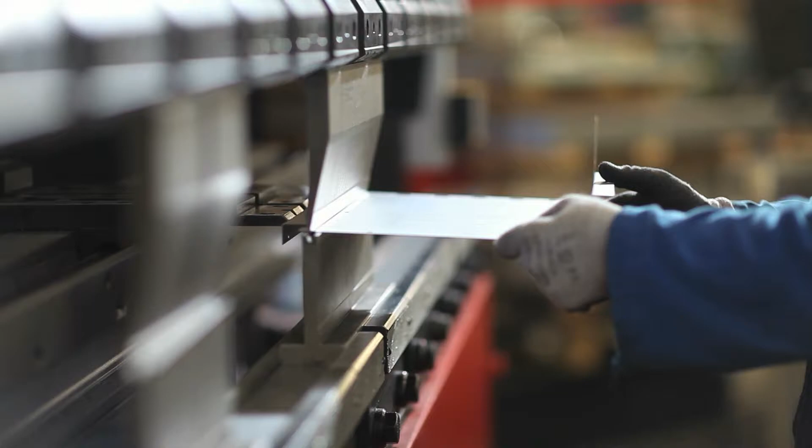Need sheet metal designs fast? Meet BricsCAD Sheet Metal.

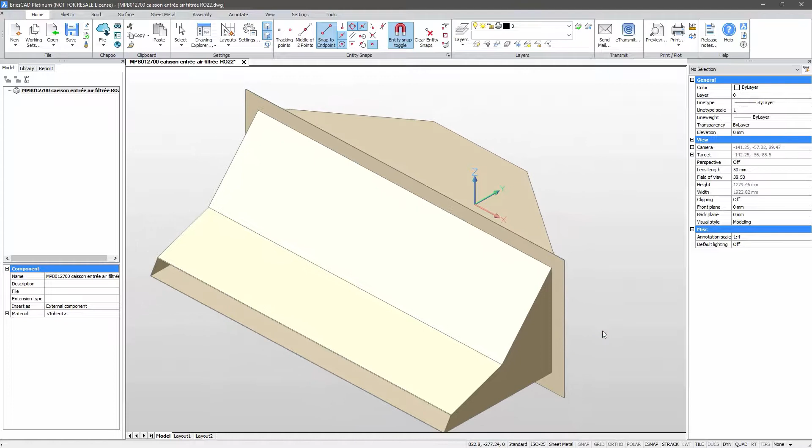Let's investigate the creation of a sheet metal airbox from an existing solid model. We'll import a step file. Here on the Properties panel, you can see that we start with a simple 3D solid.

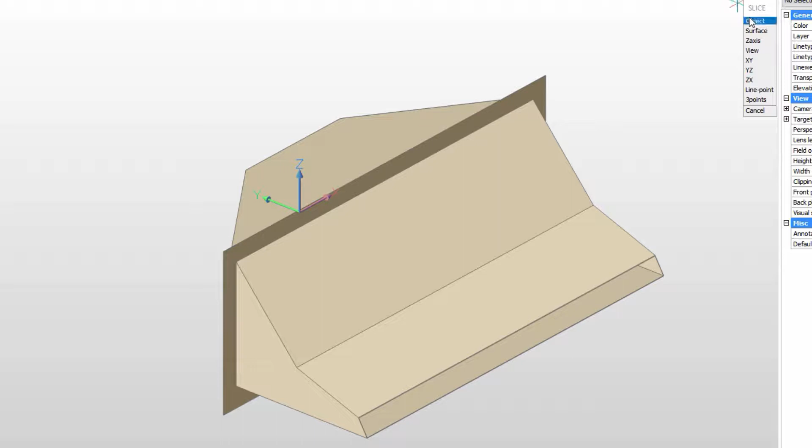If we want to make this part from sheet metal, we're going to have to break it down. We'll simply slice the model in two, using one face of the thin middle plate as a guide. Then we'll repeat the procedure on the other side.

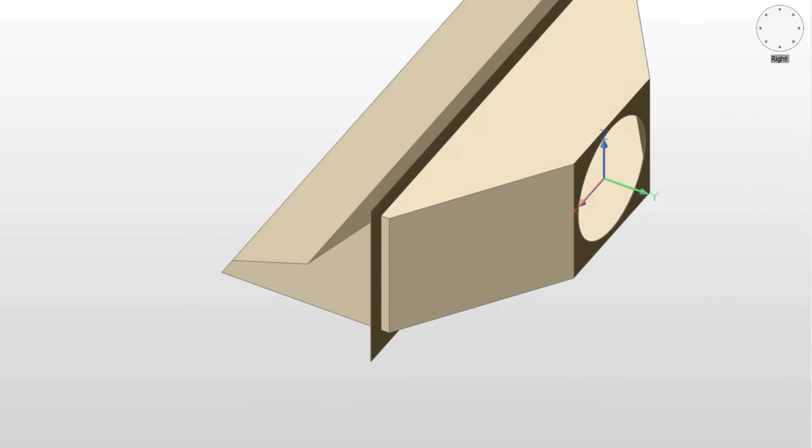Let's spread the part out a bit so that we have some room to work. 1 minute in, and we've imported, sliced and positioned the geometry for the next steps.

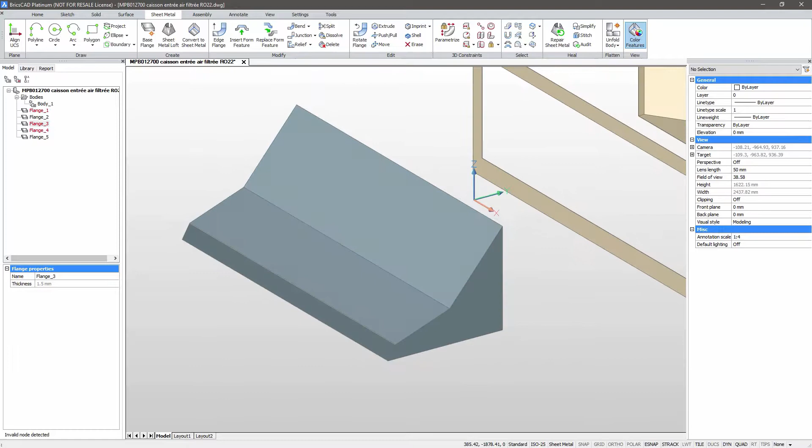We'll convert the first half of the airbox to sheet metal. Look at the mechanical browser. We now have a body with 5 flanges. We'll start creating junctions by selecting 4 inclined edges of the part.

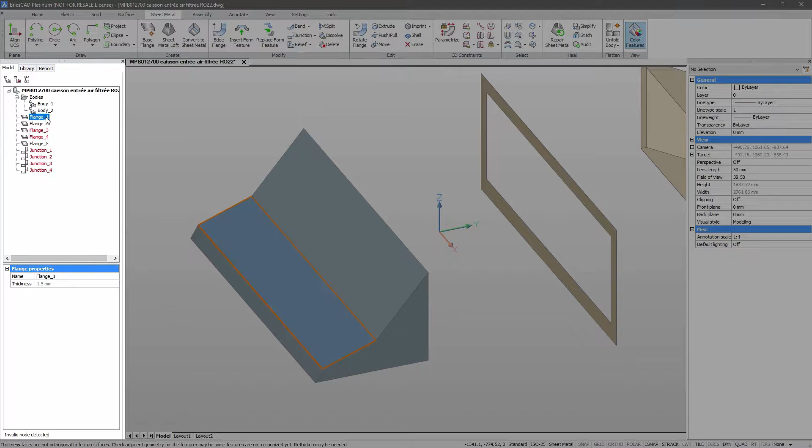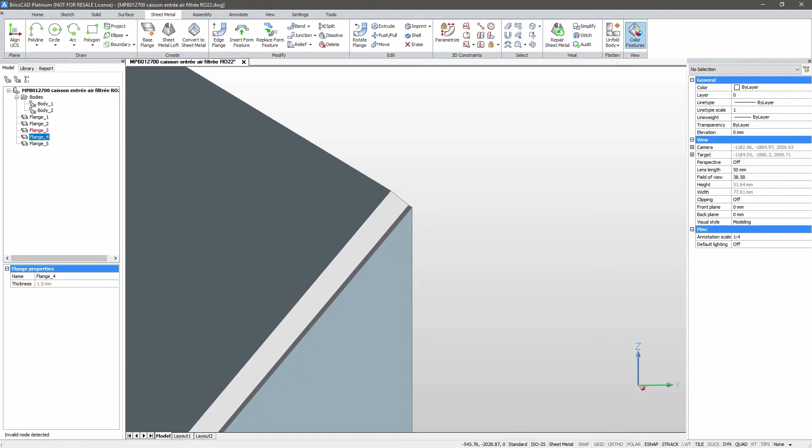Okay, BricsCAD has flagged several components in red. Let's fix them. Let's zoom in on flange 4. The side face is not orthogonal to the flange. The repair takes seconds. Let's do the same repair on the other side of the part.

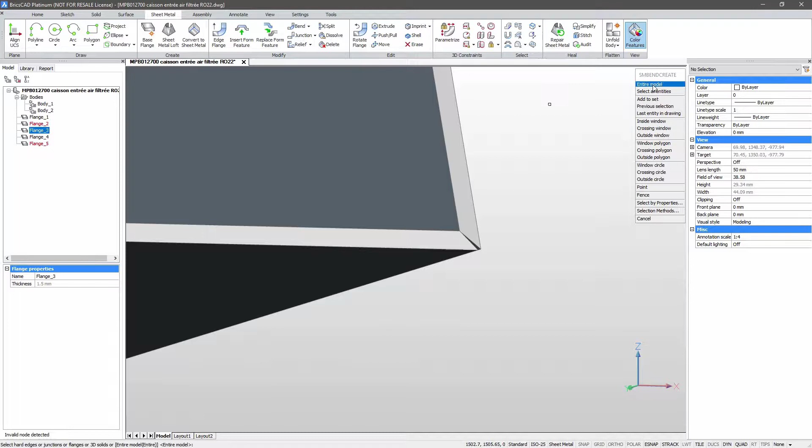This mismatch will be fixed automatically at bend creation time. We'll bend the entire model in one pass, with reliefs created automatically. You can switch the type of relief simply by selecting it.

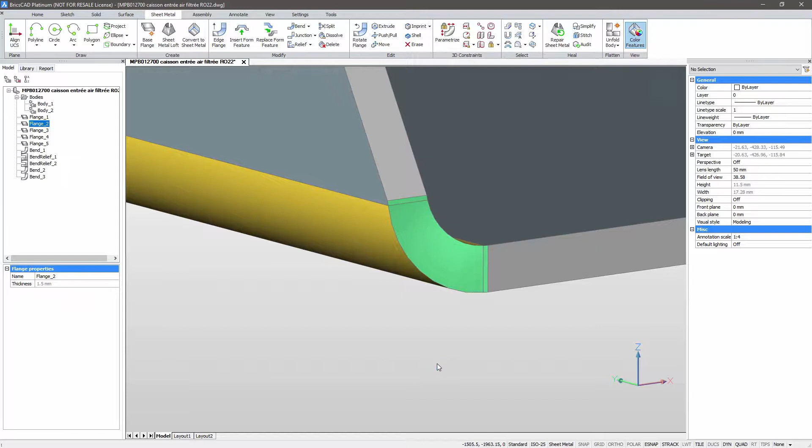Okay, our model is clean and valid. Let's unfold it. Note that the unfolded representation shows all necessary bend annotations and overall dimensions.

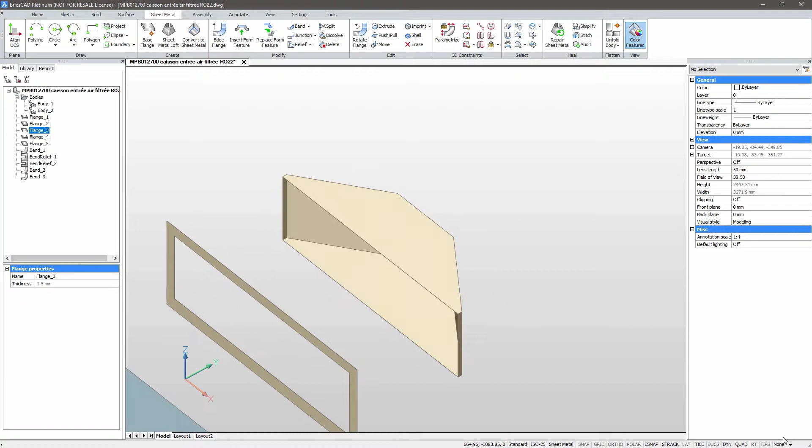Let's move to the second part of our imported model. We'll use the sheet metal convert command again, and you'll see that all new flanges are valid from the start. We will create reliefs across the entire model with one command.

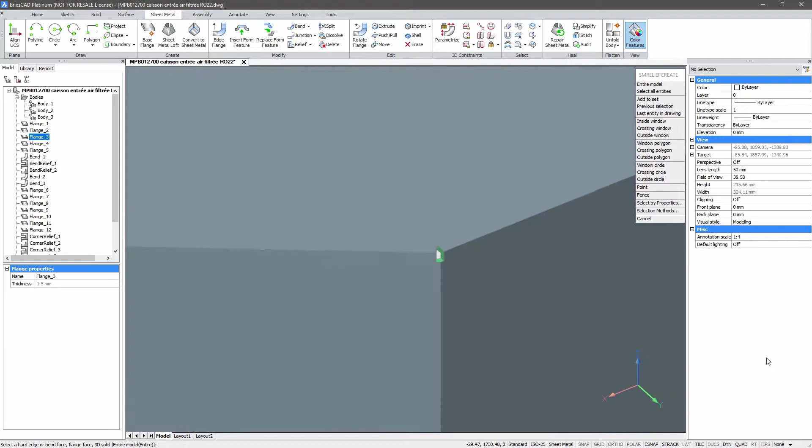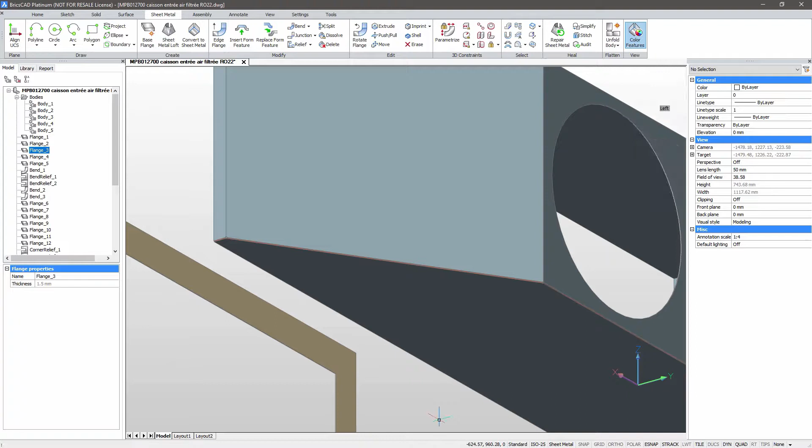Hard edge junctions are also created automatically. Select a flange and all hard edges will convert. Let's do the same for the bottom flange. And now we'll apply bends to the whole model. We'll unfold.

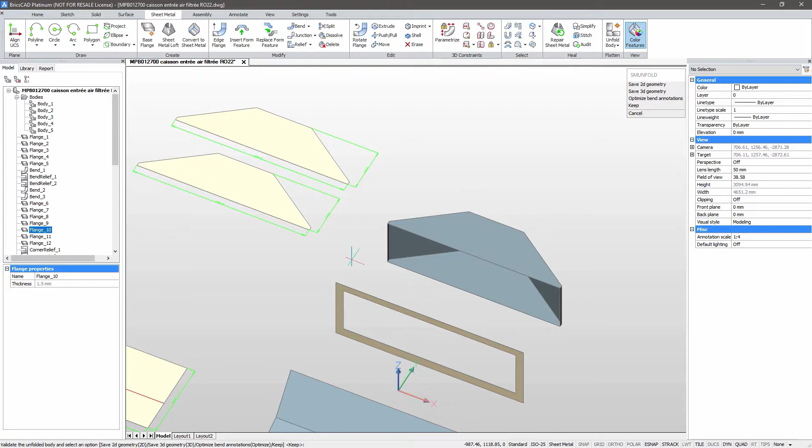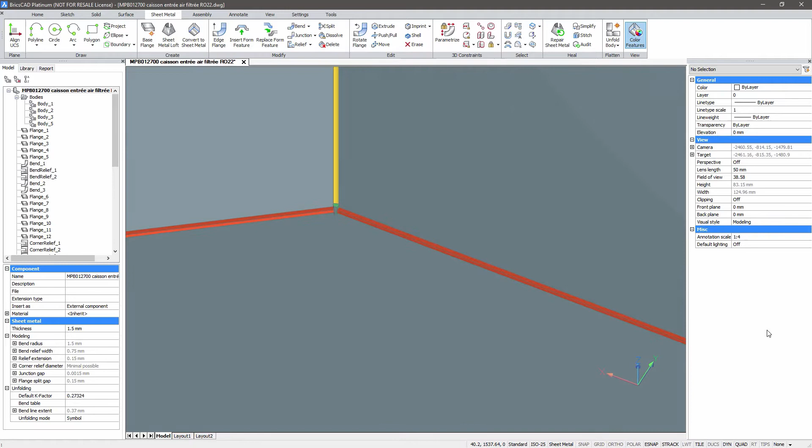Now we have 2 symmetrical parts and the center with the circular hole. But here's the real beauty of BricsCAD sheet metal. If we need to change the shape of the part, it's easy and robust. Edit deeply without the need to start over, ever. Perfect. This flat pattern is perfect.

One part left to make. One simple body with one flange. Done in 5 minutes and ready for fabrication.